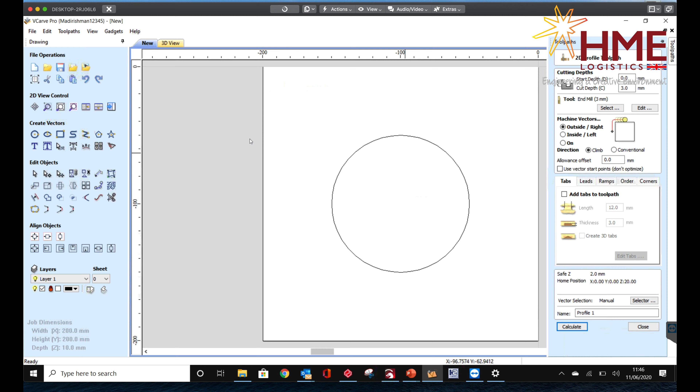So the center of the circle, we want at -100 by -100, and that will put it dead center of the material we're working on, and the radius at 50mm. We then press create, and that puts the circle directly in the middle of the material. Press close at this point and move to the right hand side of the screen and select the toolpaths icon. Click on create a profile toolpath.

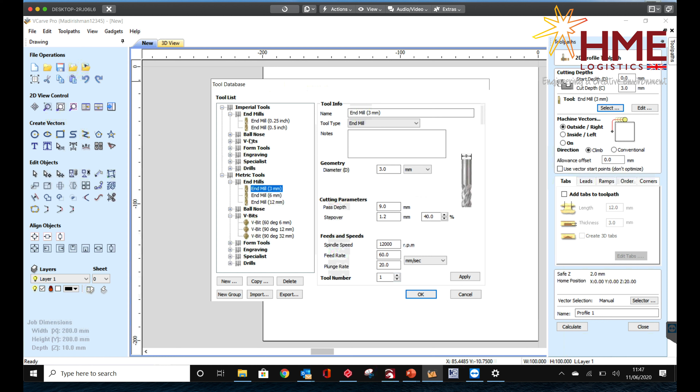Click on the circle and this will create a lilac dotted line. Again, click on the toolpaths. The start depth is 0, is the top of the material itself, with a cut depth of 3mm. We move down to the name, click by profile, delete it, and call it what it is for today, circle, and press calculate.

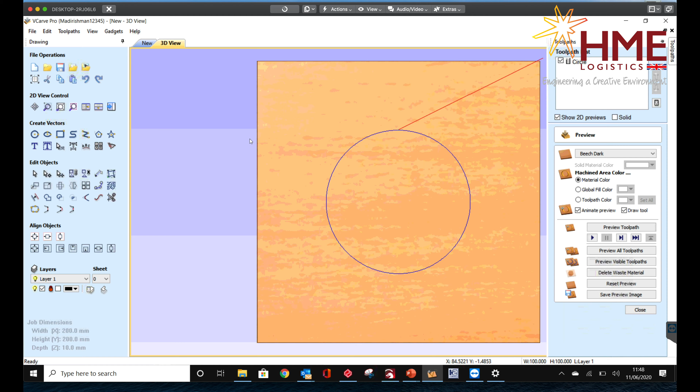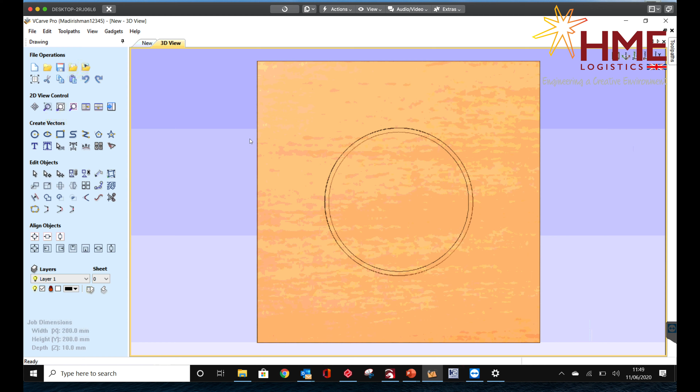What this then does with the program, it's where the start point is at 0, the toolpath coming into where the material is going to be cut, and creates the actual path for the 3mm cut depth. You can demonstrate this with a preview of all visible toolpaths. So close that down, click on to new, which takes us back into the design. This time click on square.

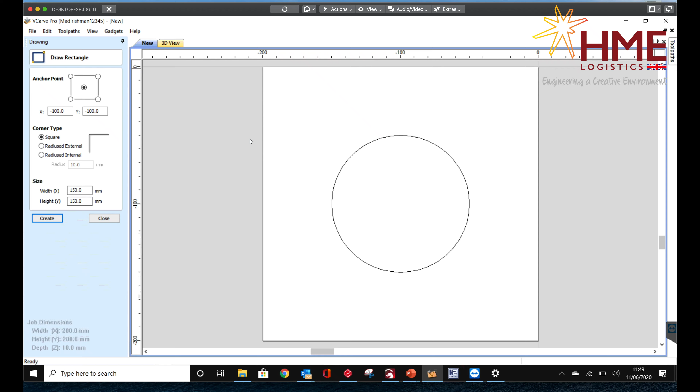Again, for the anchor point of the square, we're going to use the center of the material again, which is -100 by -100. The width and the height, if you remember, the radius of the circle before was 50mm, so it gave us a diameter of 100mm. I had to think about that then for a second. We're going to make this slightly larger, so it's 150mm by 150mm. We then create it, and that gives us our second shape.

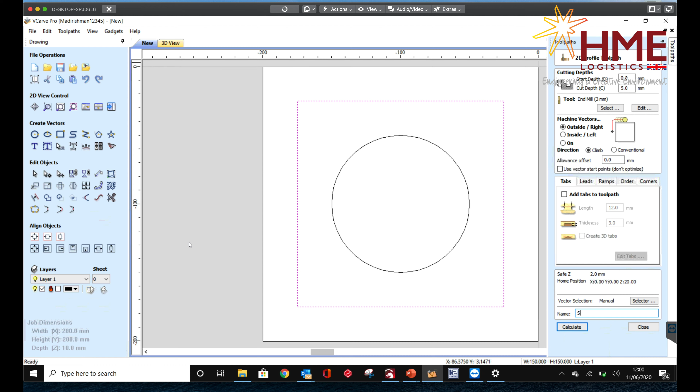Close that again. Click on the item we want to create the toolpath for. Top right hand button again on toolpaths, create profile toolpath. This time we'll go a little bit deeper. So this time we'll do a 5mm cut, and we will move down to name, and we will call this square, and calculate. At this point we can preview all toolpaths, and it will simulate the cut on both of the designs that we've created.

So that covers how to create basic shapes and how to create the toolpaths using the Vectric software. We're now going to move on to actually utilising that design and how to use it on the machine itself. So after you've double clicked on the icon, the program will launch. First thing to do is, if you look across the top, you'll see run in red. You come across to configuration, click on configuration.

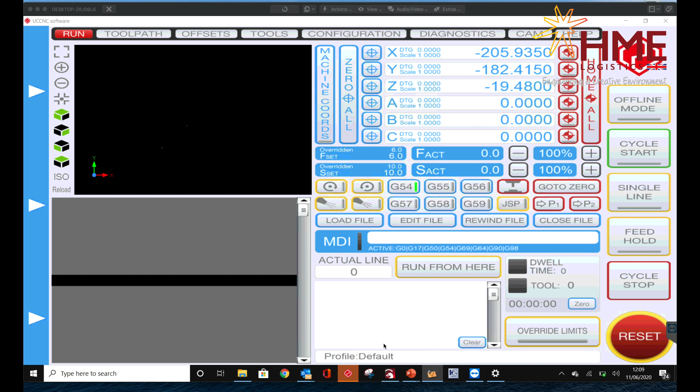So after configuration, move across to profiles, which is on the middle row on the far right hand side. You'll see a list of profiles. Click HME, click on load profile. You will hear a slight click from the machine when you do this. Press apply settings. Again, you should hear the CNC click if you're in a quiet environment. Press reset, come across to run.

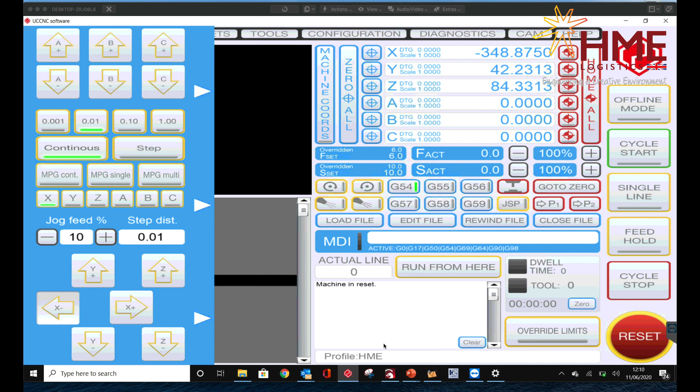And at this point, if you come over to the left hand side of the screen, the menu will pop out, and you can use X, Y and Z to actually move the machine around. Just quickly go through each axis just to make sure that the machine is working correctly. Once you're satisfied that each axis is moving, come over to the right hand side of the screen, click OK.

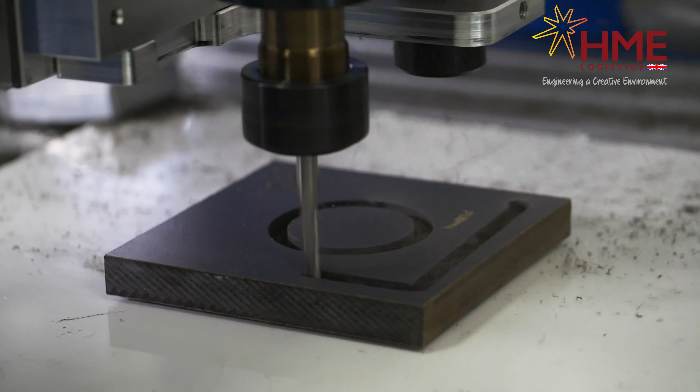So that's it. We've run through the program and we've run through the machine. As you now know, it's fairly easy to do.